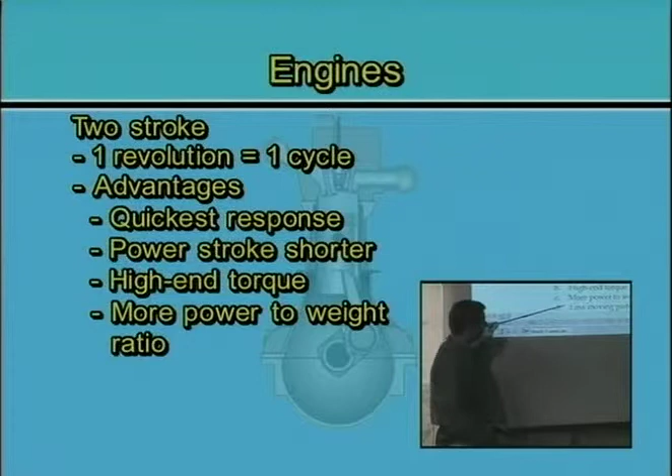When you look at a string trimmer or a chainsaw, basically I have a piston, a connecting rod, a crankshaft, and a flywheel on the end. And the only really moving parts is the piston and the connecting rod, and that's it.

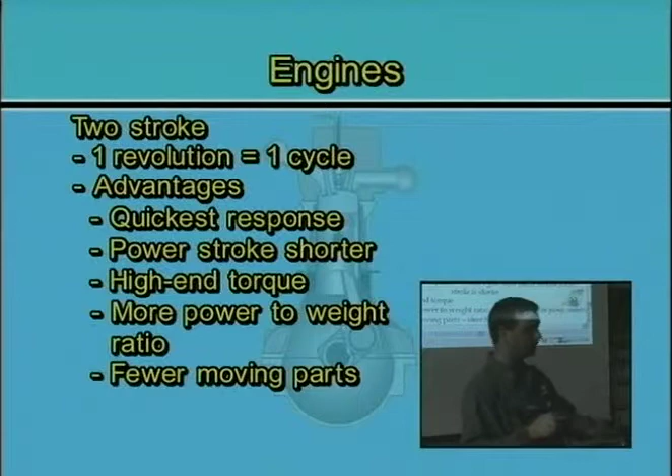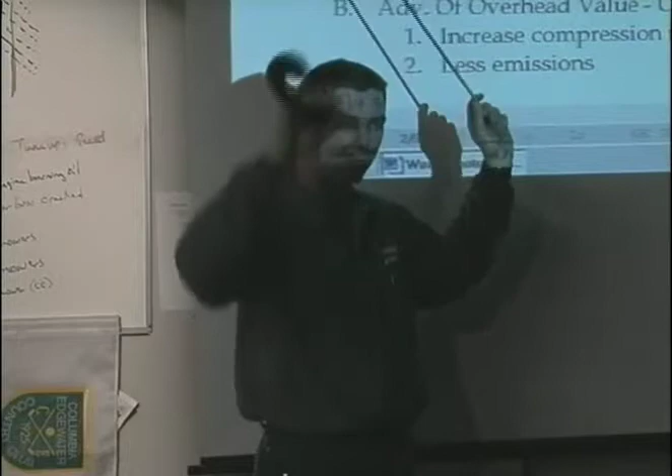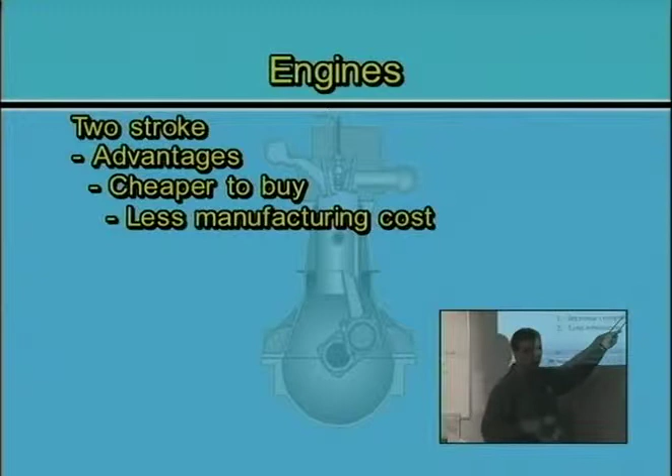It can operate in any position. I can take a chainsaw, flip it upside down and right side up. Because it has no oil in it, it doesn't matter. If I flip it upside down, the oil doesn't run into the piston because it's in the air. It's cheaper to buy because there's less parts. It's easier to manufacture. There's less resistance. There's no oil for the crankshaft to have to churn up. And so there's all those less components to be turning. I have less friction. It's going to actually operate more freely and more efficiently.

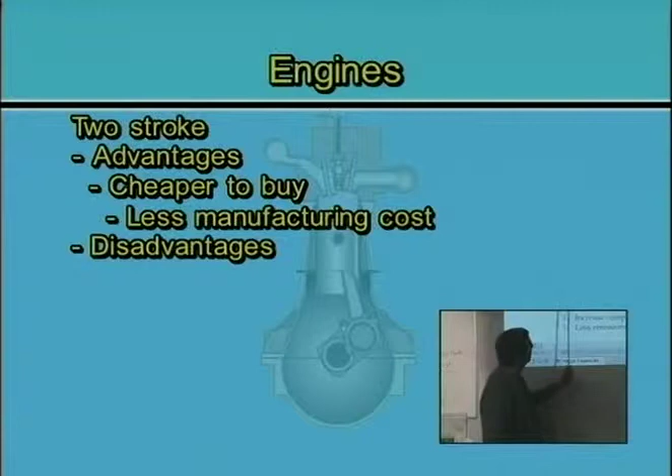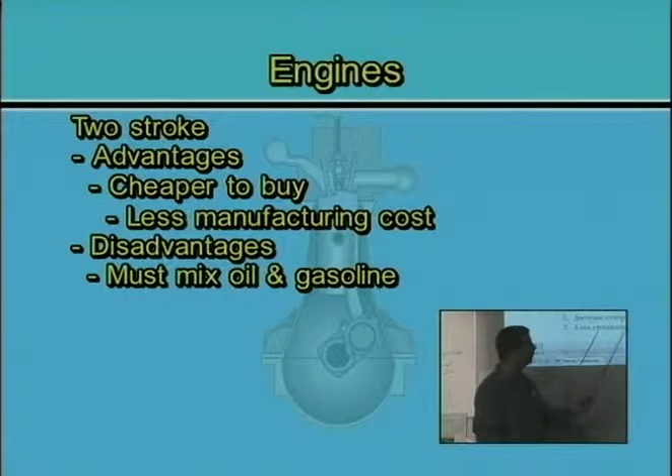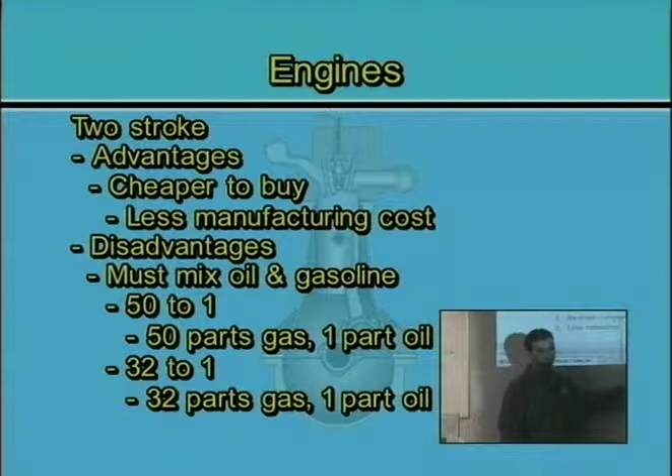I got to make sure that I mix the fuel. There's some two-strokes out there that you put oil in one reservoir and gas in another, and it injects the oil and mixes it, but most of what you're going to deal with, you mix it into the gas. So 50 to 1 would be 50 parts gas, 1 part oil. 32 to 1, 32 parts gas, 1 part oil. We talked about that already. Make sure you mix it, and you want to mix it according to the little container. Read the manual, because some manuals are going to be different, but usually it's the oil that's going to determine how well you can mix it.

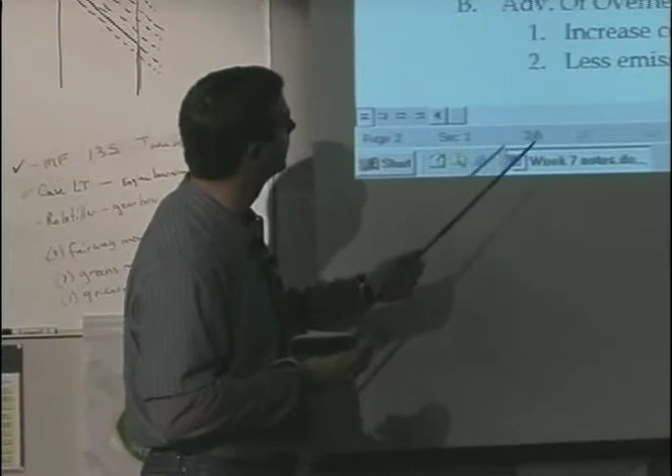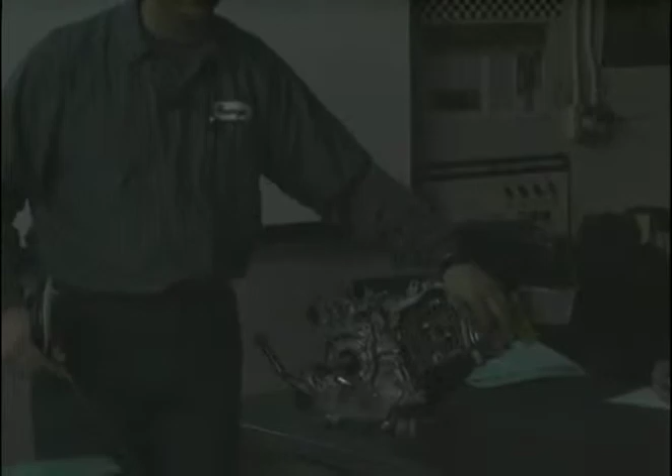I'm going to kind of skip over this, but the difference here is valve arrangement - you've got overhead valves and L-head valves. Looking at these two engines right here, both of these engines are 8-horse engines. This one has a tin cover out here, it's got overhead valves. This one here has a flat head, the valves are down in the side of the block. The big difference is going to be how much compression these things have. This is a high compression engine. This is a low compression engine. This one's going to run less efficient than an overhead. Anything with overhead valves is going to be a more efficient, better quality engine than an L-head valve or an L-head engine.

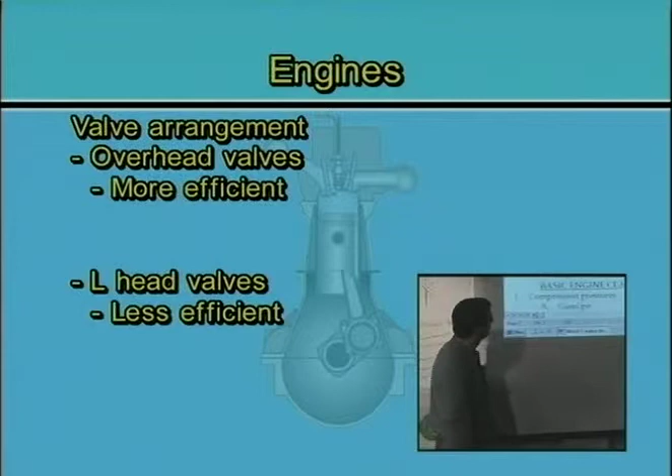And so when I'm going to buy an engine, is it overhead valves? Does it have pressure lubrication? Does it have an oil pump? What does it have? Overhead valve is going to give me more compression ratio, higher, and it's going to have less emissions.

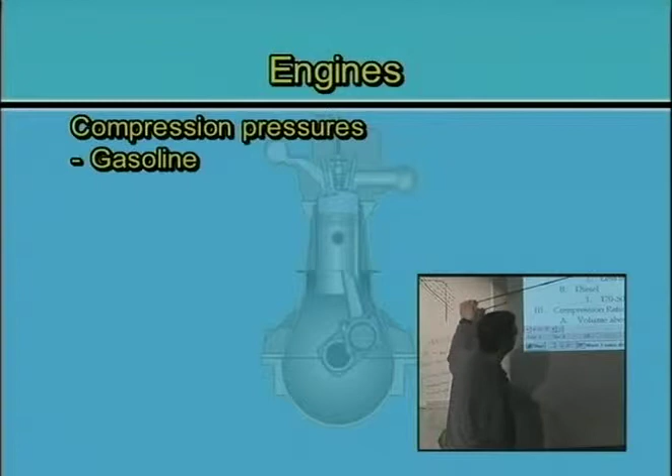Looking at compression pressures, in a gasoline engine, a typical compression, if I'm going to take a compression test to see what the condition of my engine is, typical numbers I'm going to see is from 60 to 160. If I take a compression test on an engine and it has less than 60 pounds of compression, its likelihood of starting is pretty much 0. That engine has a problem, it needs to be taken in for repair. If I have over 160 pounds of compression, what's going to happen is when that piston comes up, it's going to compress the mixture too much. It's going to cause too much heat. And since the air and fuel is already in there and mixed up, if I put heat with air and fuel, I get ignition. And that's where you get that detonation that we talked about on the test and earlier in this quarter.

So detonation would come if my compression ratio was too high, and so we're limited by that. Diesel engines start around 120 - less than 120 they don't start - and they go all the way up to 500 pounds of compression. So you put a compression test in there and crank that engine over, 500 is a very common number to see. That's a high compression diesel engine.

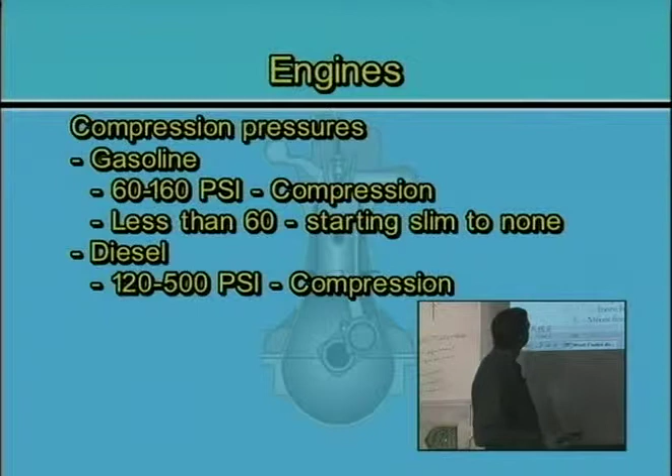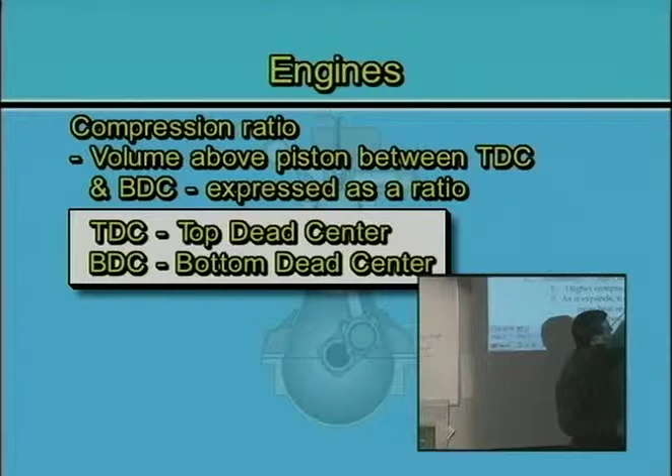What is compression ratio? Compression ratio is the volume above the piston between top dead center and bottom dead center - that's what those two initials stand for. It's expressed as a ratio. A gas engine is an 8 to 1, which means I take 8 parts volume and put it into 1, or 14 to 1. That's the maximum compression I can have on a gasoline engine before I'm going to start seeing detonation, or I'm going to have to start using special fuel.

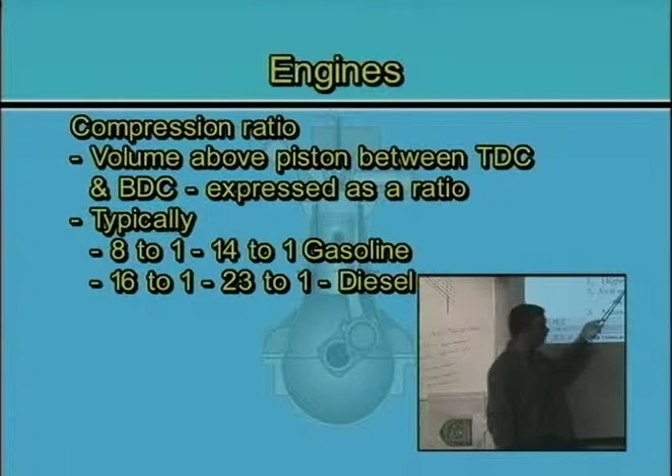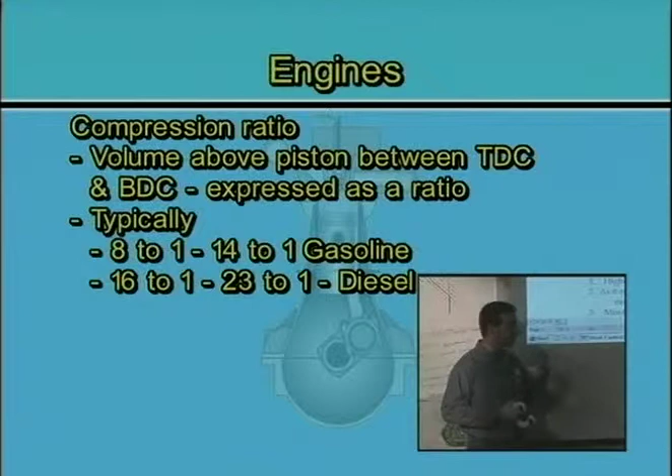I'd have to use premium unleaded fuel if I start running up around 14. If I tried to use a 15 to 1 compression, I'd have to run premium unleaded fuel to deal with the detonation and problems I'm going to have. And so that's why you don't see them get higher than that. On a diesel engine, we're not going to start until we get to 16 to 1, and we're going to go as high as 23 parts to 1. And when you mix that much volume into one small area, you're going to create a tremendous amount of heat. And it's that heat that we're creating that we're going to use to ignite the fuel when we actually throw the fuel in there.